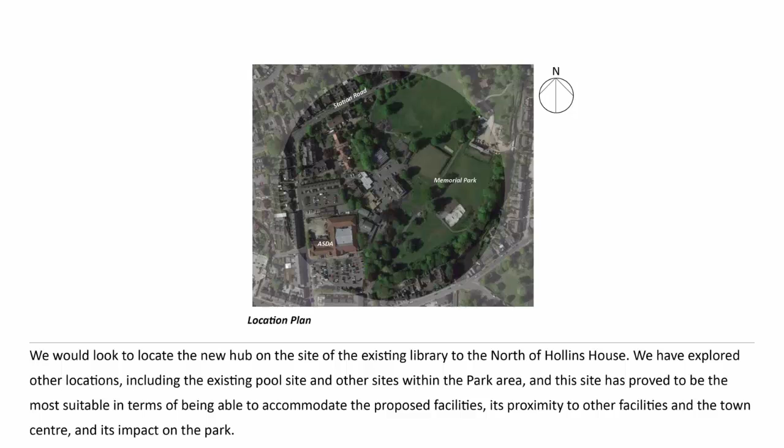We would look to locate the new hub on the site of the existing library to the north of Hollins House. We have explored other locations, including the existing pool site and other sites within the park area, and this site has proved to be the most suitable in terms of being able to accommodate the proposed facilities, its proximity to other facilities and the town centre, and its impact on the park.

Many of you asked why we are not using the site of the existing pool, but unfortunately this is not big enough to fit a new larger facility.

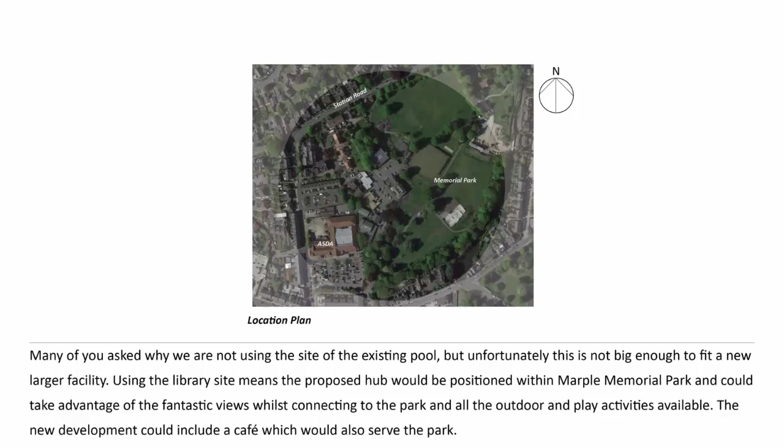Using the library site means the proposed hub would be positioned within Marple Memorial Park and could take advantage of the fantastic views while connecting to the park and all the outdoor play activities available. The new development could include a cafe which would also serve the park.

We currently have 3 potential options which are explained in more detail later in this presentation. The first option is our core brief, which would provide replacement library and leisure facilities. The second and third options then include additional facilities to enhance the core brief, grouped into community and health.

Both of these options would allow existing buildings on the site to be removed. At the moment, we are not looking to include facilities for the Scouts or police in our proposals, although discussions with those organisations are continuing.

Key themes. These are design concepts that are important to the aspirations of the project. They create the main objectives which inform our designs.

Strengthening a community heart: connecting the new centre to the wide variety of existing community and leisure uses nearby to strengthen and provide a focus for the established community spirit.

Increasing participation inclusively, encouraging more members of the community to take part in activities, both physical and community-based, whilst ensuring that these activities are inclusive to all.

Big offer on a community scale, creating a flexible development that offers a wide range of uses through making spaces work hard whilst maintaining a community scale and public feel.

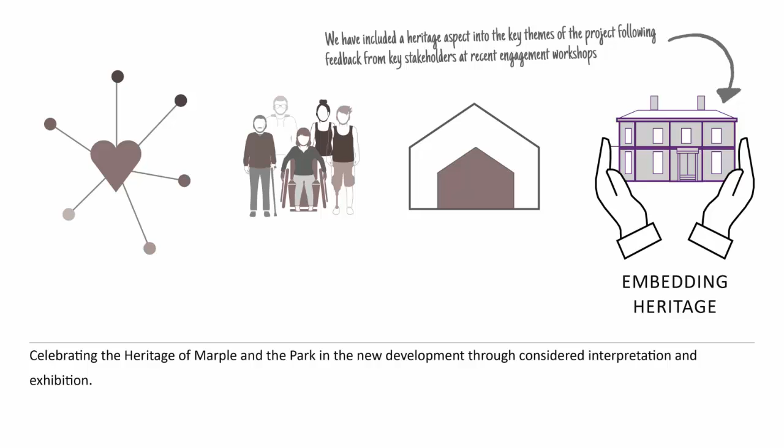Embedding heritage, celebrating the heritage of Marple and the park in the new development through considered interpretation and exhibition. We have included a heritage aspect into the key themes of the project following feedback from key stakeholders at a recent engagement workshop.

Option 1, Core Brief. We are calling this option the Core Brief as this would provide replacement library and leisure facilities, the core of the project. The Core Brief includes the removal of the existing library building and the provision of library facilities and community rooms in the new building. It also includes a swimming pool and fitness suite to replace the existing swimming pool in Marple.

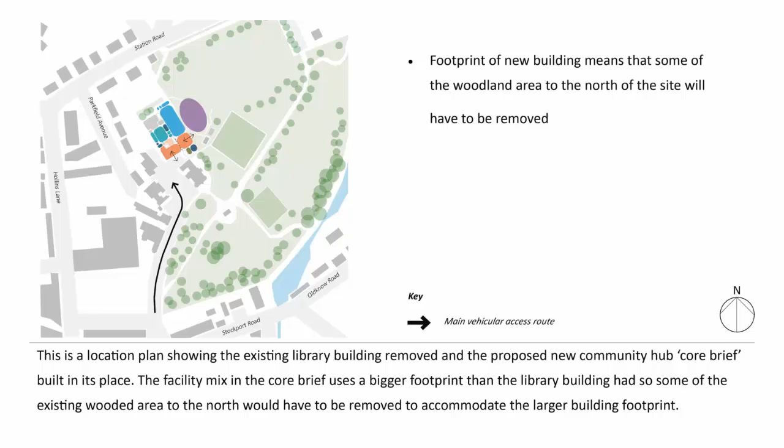This is a location plan showing the existing library building removed and the proposed new community hub Core Brief built in its place. The facility mix in the Core Brief uses a bigger footprint than the library building had, so some of the existing wooded area to the north would have to be removed to accommodate the larger building footprint.

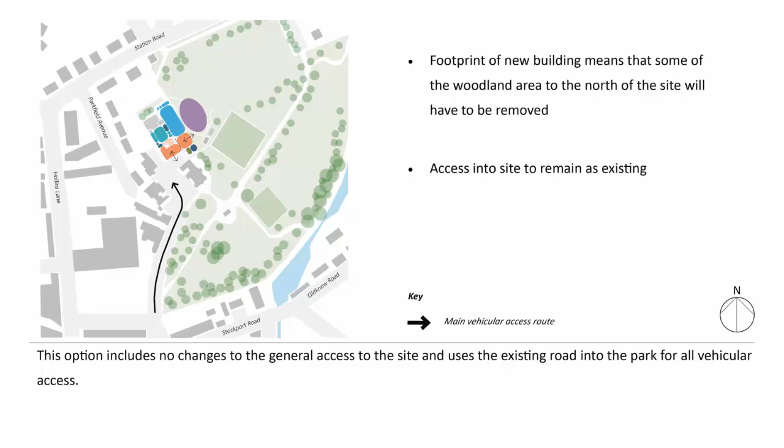This option includes no changes to the general access to the site and uses the existing road into the park for all vehicular access. This option removes only the existing library building. All other buildings around the site, including the healthcare building, the Senior Citizens Association building, the Scout Hut and the police building, are to remain.

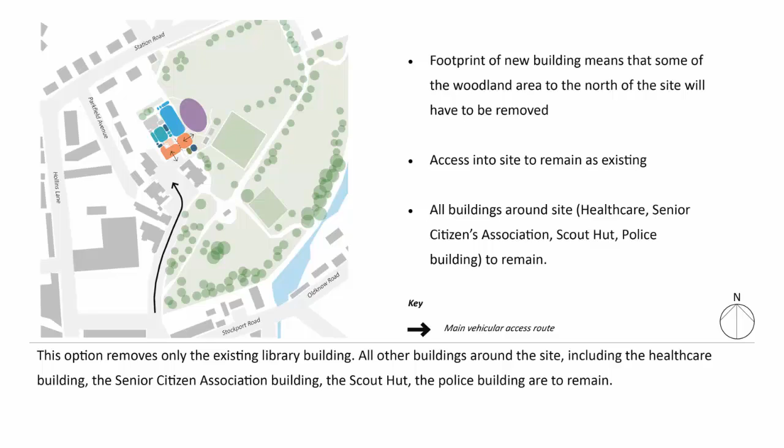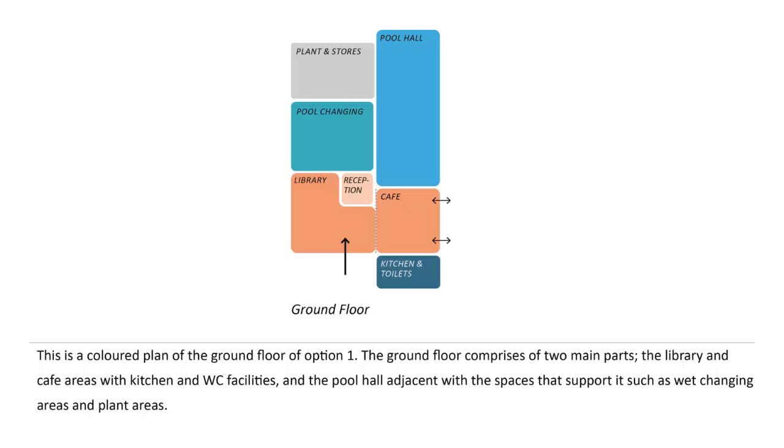This is a coloured plan of ground floor of option 1. The ground floor comprises of two main parts, the library and cafe areas with kitchen and WC facilities, and the pool hall adjacent with the spaces that support it, such as wet changing areas and plant areas.

We envision that the main entrance would be off the existing car park and into the ground floor library space with reception and cafe. The cafe would overlook the park and tables could spill outside in warmer months. The pool area would also face the park so swimmers could get park views whilst they are in the pool.

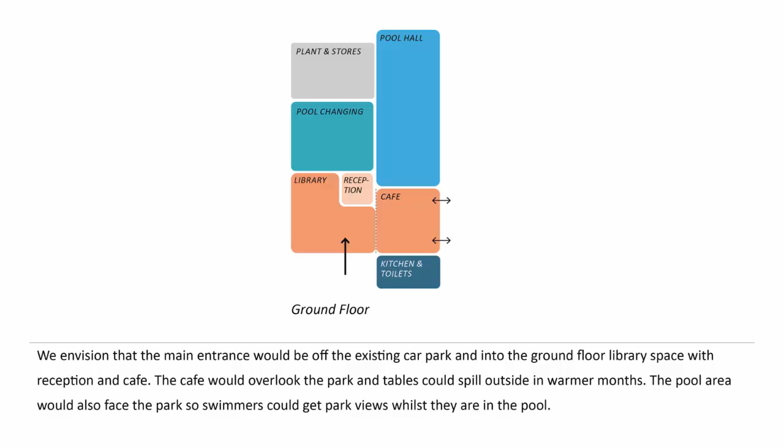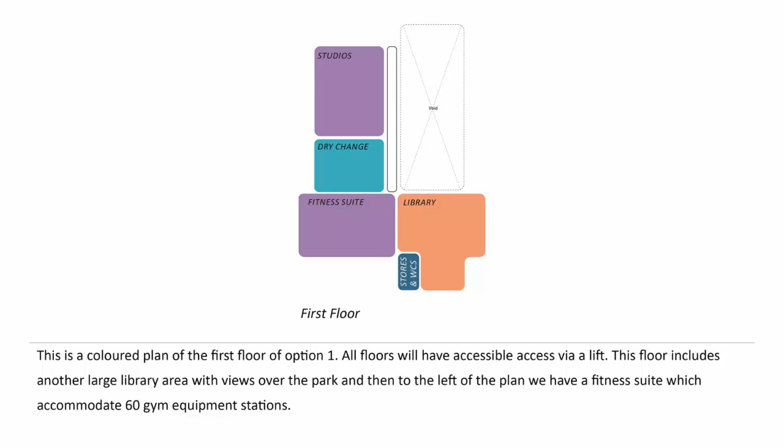We then have, towards the back of the building, a studio space which can be used for exercise such as dance, yoga and spinning classes. And we have a changing area that serves both the studio spaces and the fitness suite.

On the second floor we have a community room which will take advantage of the long-range views over the park, and we have a multi-use room which can be both a community room and a studio depending on what activity is taking place.

This shows the three levels side by side. In order to accommodate all of the facilities, the building has to be this size. However, we envision the second floor to be more of a mezzanine area where the rooms on that level would be able to see down into the rooms below.

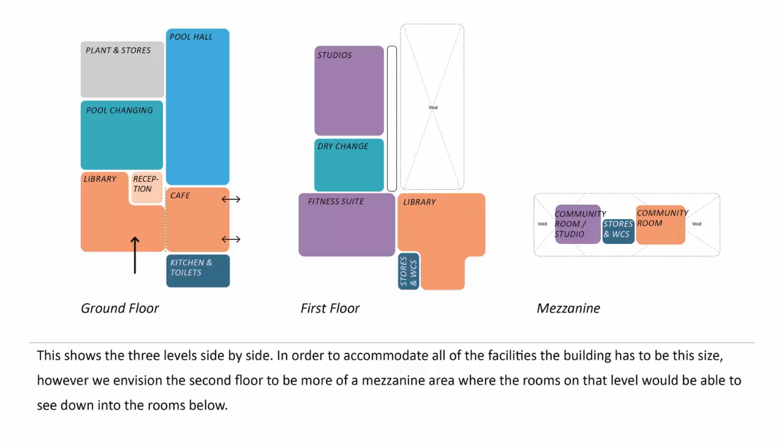The second and third options then explore additional facilities to enhance the core brief, grouped into community and health. This option, Enhanced Community Brief, explored the possibility of including the Senior Citizen Association's facilities into the proposed development, along with other community uses, such as an area for young people.

The core brief is the base of all of the proposed options, and for the Enhanced Community Brief, it has the benefit of additional facilities, such as a dedicated entrance for the Senior Citizens Association, which is something that was raised in the comments from the previous engagement as being important.

In order for this to work, the extension to Hollins House would be removed. With the extension removed, we could then connect the two buildings via a shared community entrance. The Senior Citizens Association could have a dedicated entrance straight into Hollins House.

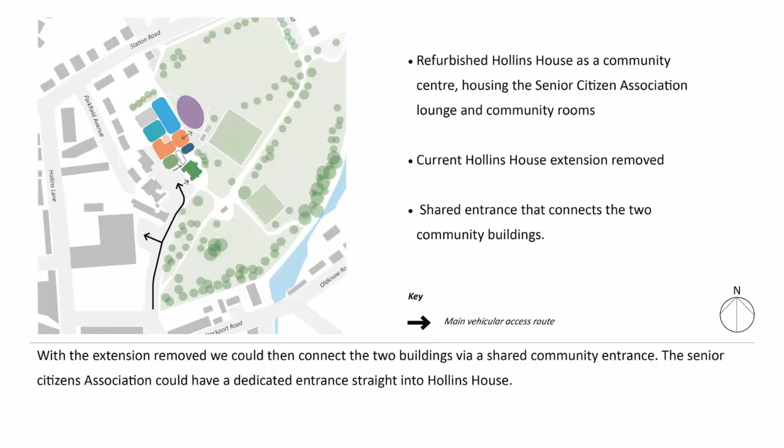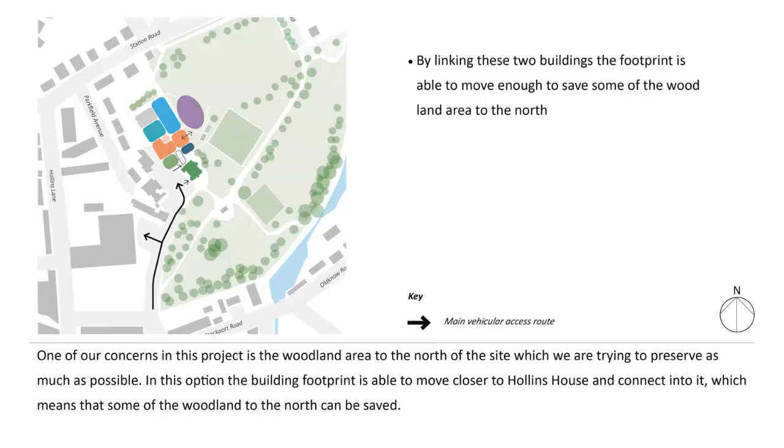One of our concerns in this project is the woodland area to the north of the site, which we are trying to preserve as much as possible. In this option, the building footprint is able to move closer to Hollins House and connect into it, which means that some of the woodland to the north can be saved.

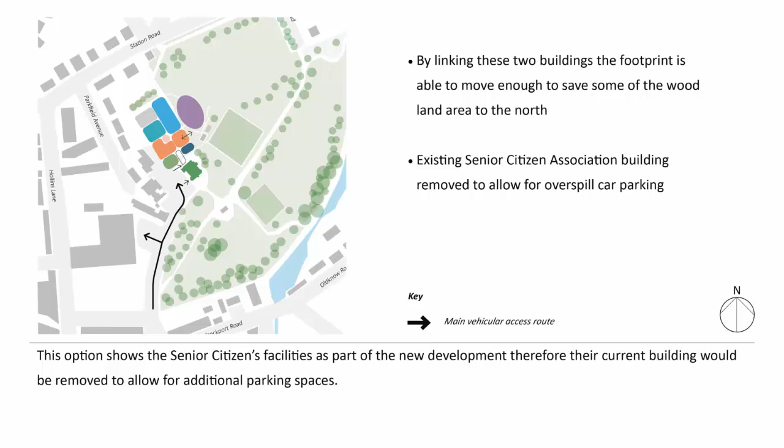This option shows the senior citizens' facilities as part of the new development, therefore their current building would be removed to allow for additional parking spaces. This option does not interfere with the existing roads. Access to the site is as existing via the existing road to the park.

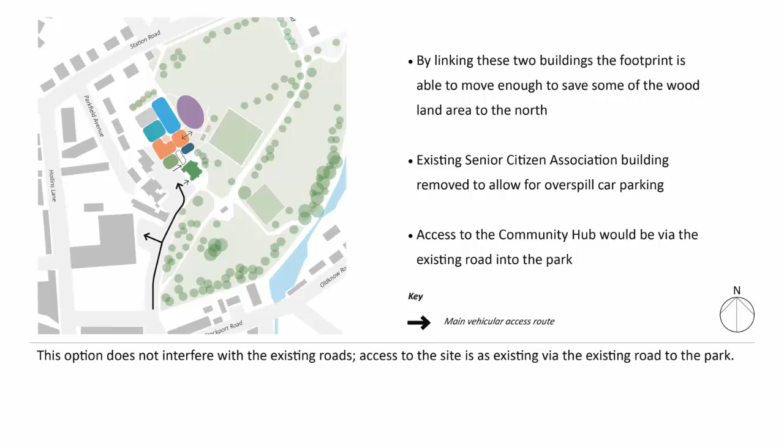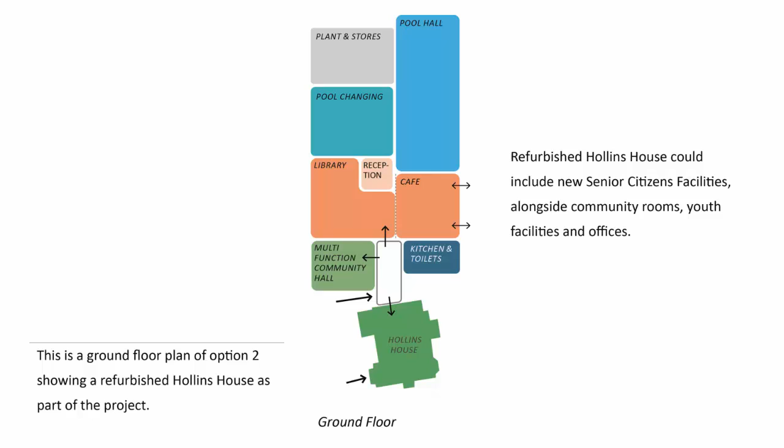This is a ground floor plan of option 2 showing a refurbished Hollins House as part of the project. Refurbished Hollins House could include new senior citizens facilities alongside community rooms, youth facilities and offices. This plan also includes a multifunction community hall with adjacencies to the kitchen and links into Hollins House.

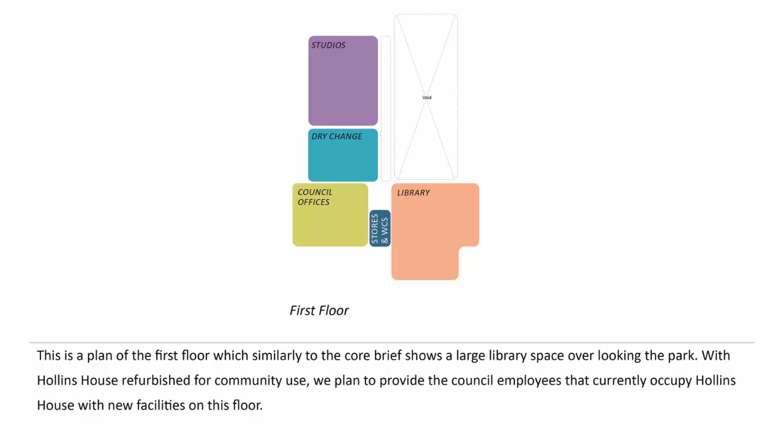This plan also shows the studios and changing areas towards the back of the plan. This option includes the fitness suite on the second floor, which would have fantastic views over the park and beyond for the people using the gym equipment and fitness spaces.

Option 3, Enhanced Health and Community Brief. This option explores the possibility of including the community facilities as shown in option 2, as well as a new healthcare provision, which would replace the existing NHS building opposite Hollins House. The facility mix builds on the previous option and also includes the healthcare provision.

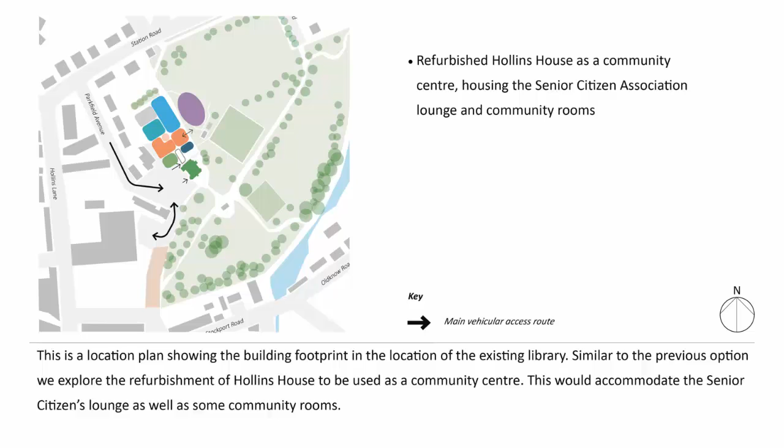This is a location plan showing the building footprint in the location of the existing library. Similar to the previous option, we explore the refurbishment of Hollins House to be used as a community centre. This would accommodate the Senior Citizens Lounge as well as some community rooms. As with the last option, this option would see the extension to Hollins House removed.

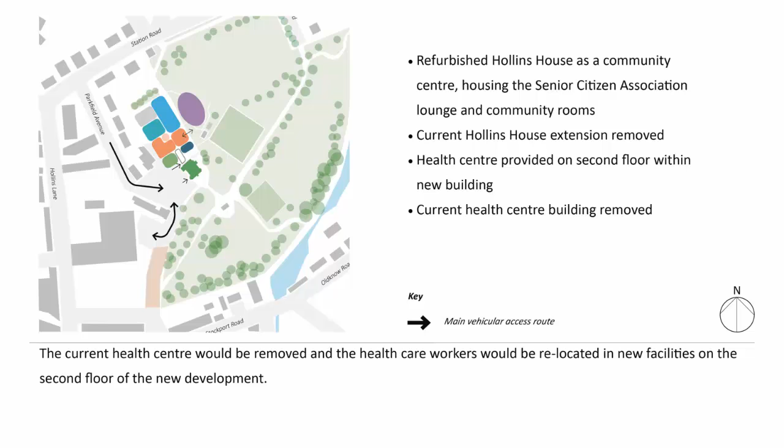The current health centre would be removed and the healthcare workers would be relocated in the new facilities on the second floor of the new development. With the removal of the existing healthcare building, access to the site could be brought in via Parkfield Avenue.

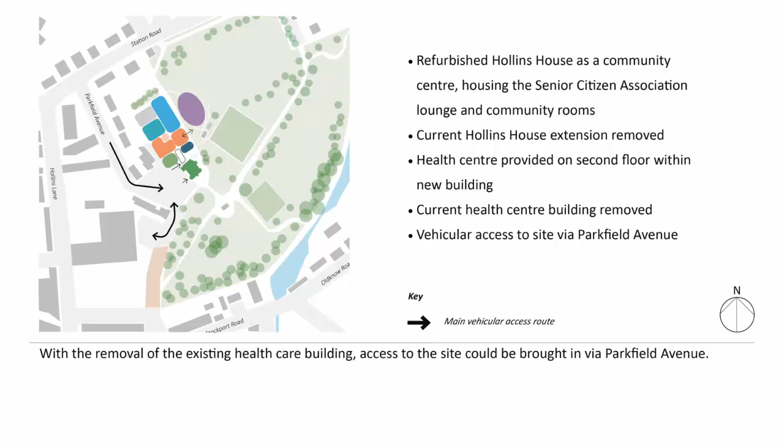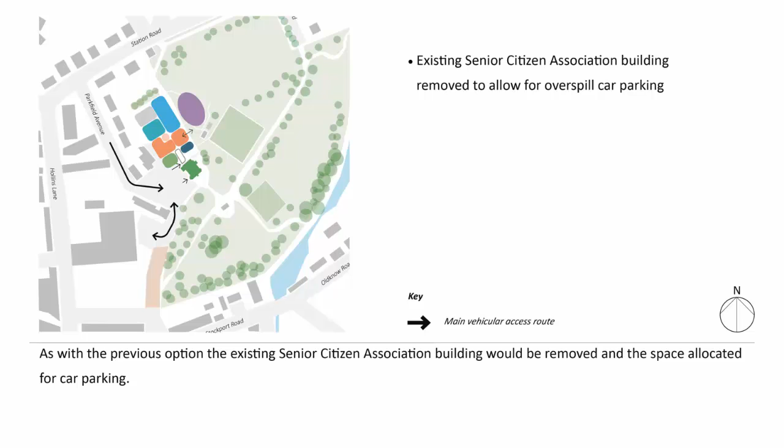As with the previous option, the existing Senior Citizen Association building would be removed and the space allocated for car parking. One of the strengths of this option is that the entrance to the park can be pedestrianised, which will allow for a much nicer and safer route into the park for pedestrians.

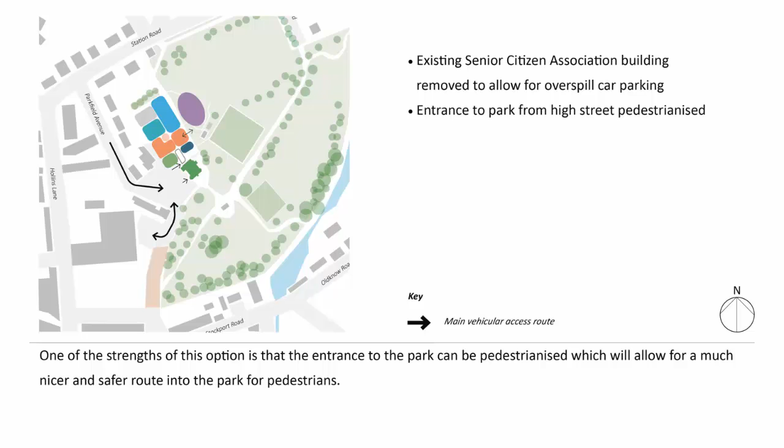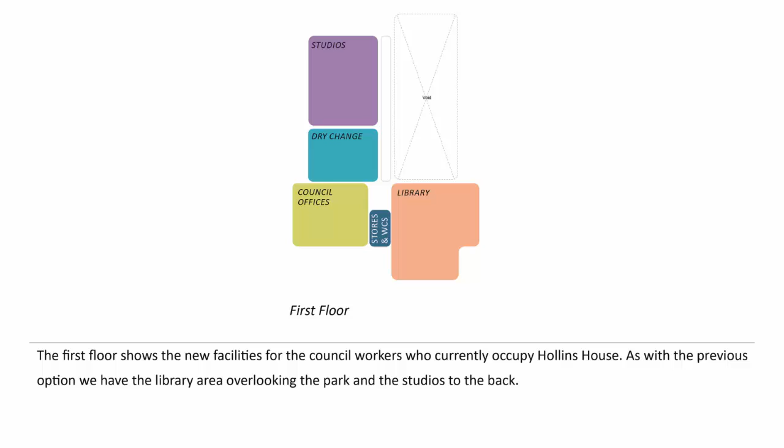The second floor accommodates the fitness suite, and then to the back of this floor is the health centre facilities, which feel slightly separate from the fitness suite, providing a degree of privacy and a quieter environment.

What are the next steps? Your feedback will be used to inform the further development of the designs. We are due to have more conversations with organisations such as the NHS, Senior Citizens Association, Scouts and the police in order to finalise a preferred option.

Subject to funding of the scheme being approved, we would then develop the plans in more detail, followed by a further invitation to give your views prior to a full planning permission.

We have exhibition boards located within Marple for you to view: one on the external wall of Marple Library and one on the external wall facing the car park of the existing Marple swimming pool building. The information on these boards is the same as what is contained in this presentation. Please view them safely at a distance from other people.

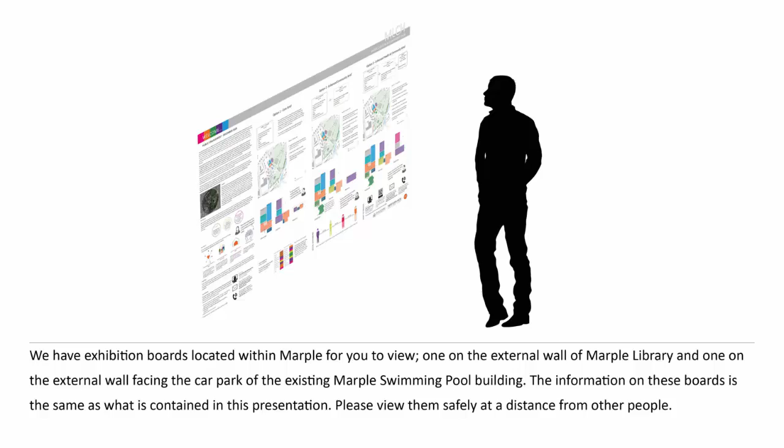What do you think of the spaces included in the hub? Is there anything else you'd like to see or something you think shouldn't be there? What do you think about the site location? What do you think about the 3 options and do you have a preference? Any further comments or ideas?

The closing date for comments to be received is the 4th of January 2021. We really value your feedback and the comments and ideas we've had so far have been invaluable in getting us to this point. Please let us know what you think.